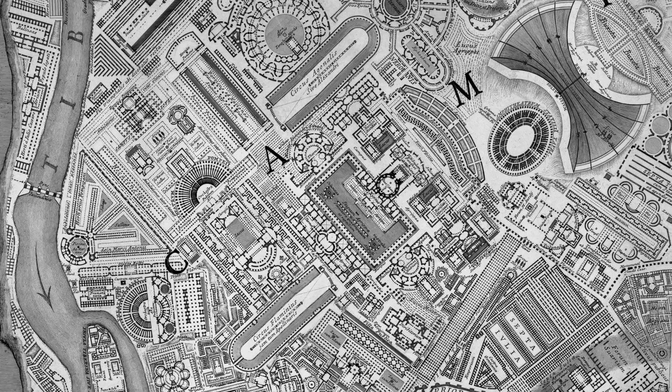The theme of this video is the Niclewicz house, a true architectural treasure hidden in Curitiba, capital of the southern state of Paraná. It is reassuring to be able to find such a serene and receptive work at a time when almost everything is appearance without substance, and when a mistaken idea of creativity predominates, resulting in extravagant objects, visually

striking but culturally irrelevant. Designed by Vilanova Artigas in 1978 for his niece, it was acquired in 2003 by Curitiba architect Marcos Bertoldi, who carried out a series of renovations which, far from disfiguring the original project, ended up further qualifying it.

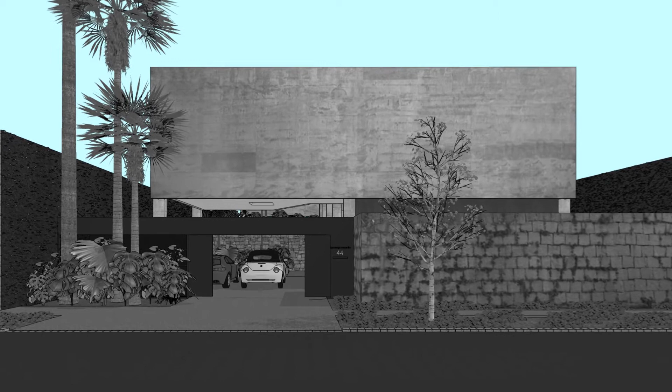The Niclewicz house belongs to the brutalist universe. But as this definition is too comprehensive, one can add to it some recurring characteristics it shares with São Paulo architecture of the period in question: the role of spatial definer of the resistant structure, the tendency to a certain introversion, and the use of large windowless end walls, in addition to the use of exposed reinforced concrete.

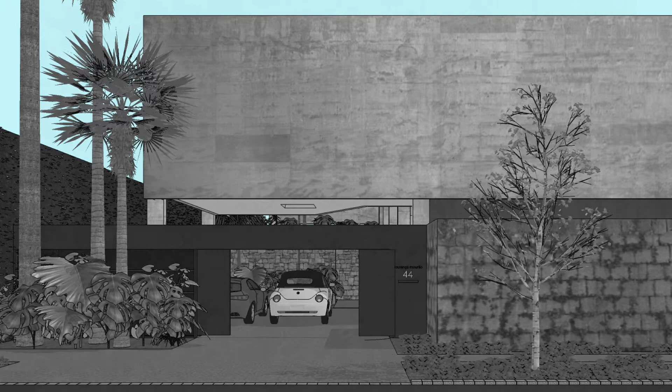The house is located in the Seminario neighborhood, a few minutes from important areas of the city in a predominantly residential street. The site is 22 meters wide by 35 meters deep, and its level is much higher than that of the street.

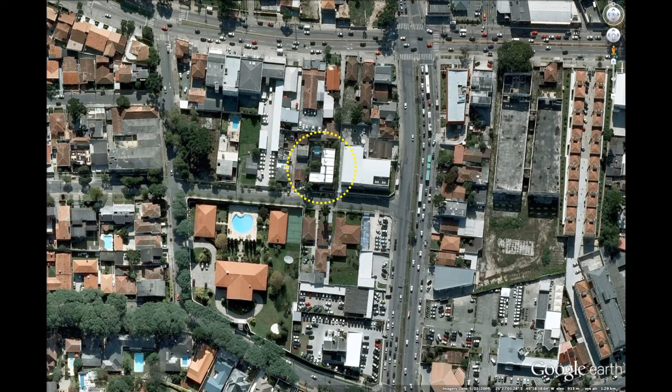It is well known that a good project can and should in general be described in a few words. Thus, we can describe the Niclewicz house in two ways, equally brief. Either we see it as an L-shaped plan that embraces a courtyard, or as a rectangular plan in which 3/8 of its projection are dedicated to this courtyard. In any case, the plan consists of 8 modules measuring 8 by 6 meters, the total measure of the house being 25 by 17.5 meters.

15 pillars of 50 by 25 centimeters are placed on this initial grid, which, with the beams that join them and the two gables on the smaller sides of the rectangular plan in exposed concrete, define not only the resistance structure but also the formal structure of the house.

This primordial role of the resistance structure is a distinctive aspect of the architecture of the so-called Paulista school, whose main exponents were Artigas himself and Paulo Mendes da Rocha, and part of the production of the Carioca school, especially the work of Afonso Reidy.

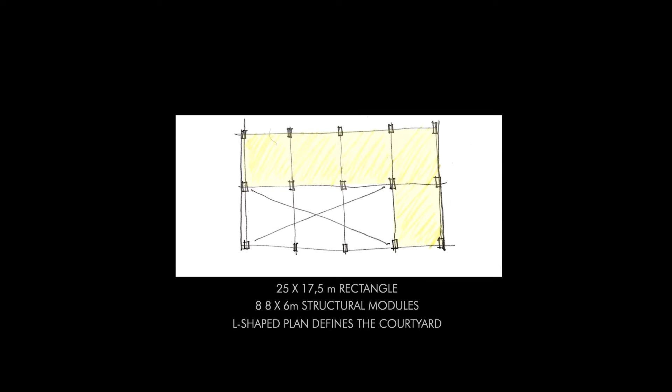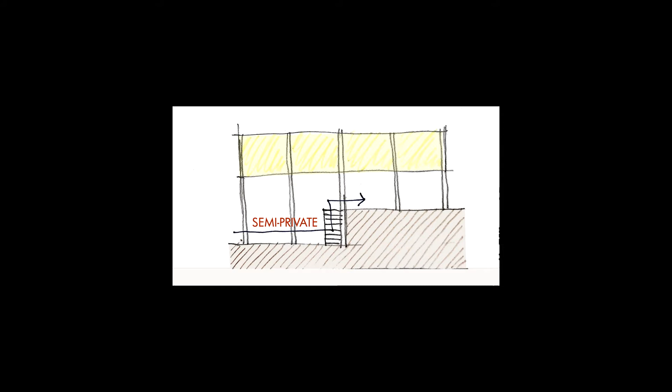This clear and consequent planimetric organization served as the basis for resolving the implantation of the house on the steep terrain. A vertical cut in the terrain coincides with half of the rectangle, defining an access and parking sector at street level, originally open to the street but later closed by a metal gate, and a higher one that defines the private courtyard.

Positioned more or less centrally on the ground, there are 4.4 setbacks at the back of the site, 2.5 at the sides, and 4.7 at the front. The circulation scheme of the Niclewicz house is an aspect that deserves some attention.

The ramp has become almost a signature in the architecture of Artigas. It appeared for the first time in 1949 at the Czapski House and evolved by means of several other domestic projects, reaching its full development here in what was Artigas's last residential project.

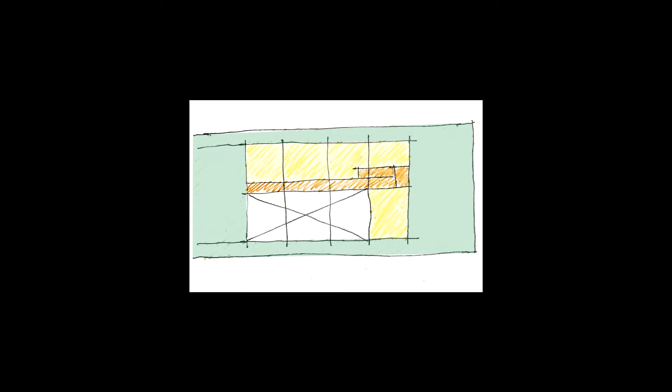Nowhere else does the ramp integrate more naturally with the spatial organization, connecting perfectly with the living room, the intimate living area, the den, and the upper corridor. Here we see the vertical circulation, which is the ramp, and the horizontal circulation, the corridor that serves the bedrooms.

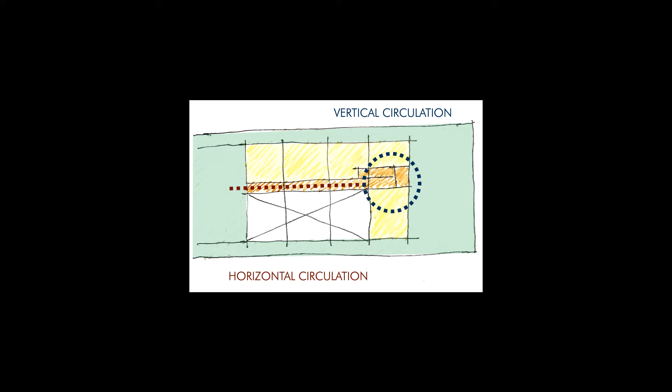The house program is spread over 4 levels. At street level, there is the access and the parking. Then comes the original level of the site, where the social area and the courtyard are. Half a story up there is a den, and another half a story up one comes to the bedroom floor.

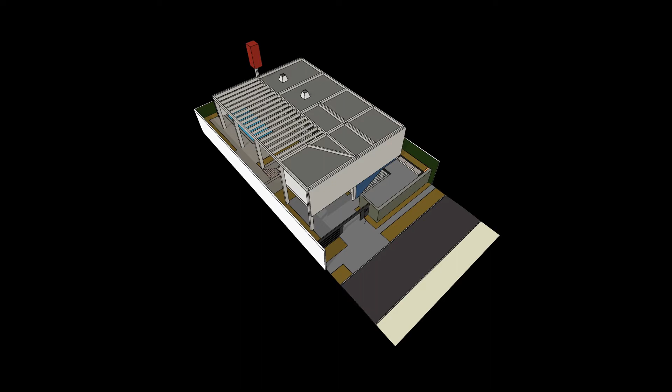If the figure of the courtyard appears in the two initial descriptions, it is because this exterior space is the visual focus of this house. A large exterior room defined three-dimensionally by the L-shaped volume that houses the interior space, by the rear gable, by three exempt pillars, and by beams that form a kind of giant pergola. In this way, we are aware of all parts of the house: the living room, the ramp, the circulation of the bedrooms, and the private room.

At the access level, we have the parking area, the main and service access, and several spaces originally for service, today transformed into the office of the architect Bertoldi, who enlarged them without this being easily perceived, as he intelligently used the space defined by the retaining walls in front of the terrain. More on that at the end of this video.

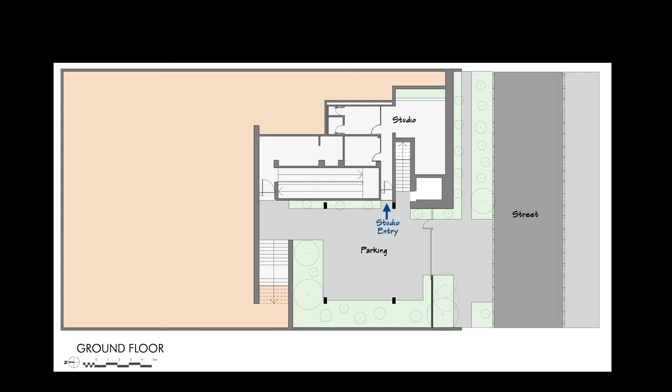And we have the access to the studio, access to the garden, and access to the house. Just after entering, there is a meeting room that serves the studio, a restroom, and the ramp. On the second level are the courtyard, the living dining room, the kitchen pantry, and other service spaces. A staircase parallel to the south gable connects the service sector to the intimate sector of the house.

Upstairs are the 5 bedrooms. Half a level below, in the shortest leg of the L, is the den, from where you have an elevated view of the patio or courtyard. With the exception of the den wing, the entire program was accommodated in the east half of the rectangle, occupying 4 modules.

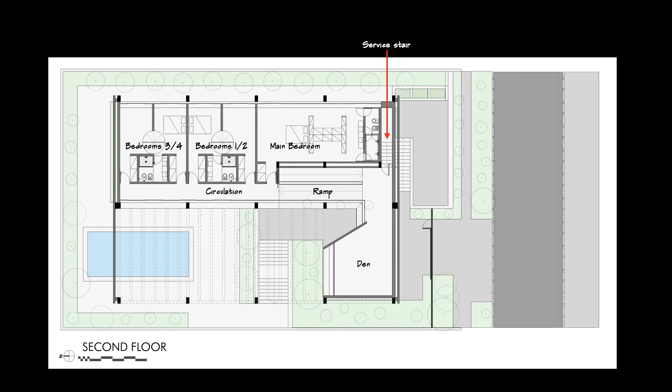Here is the roof plan, in which we can see this diagonal beam appearing, and it's a curious thing because it's the only diagonal in the whole project. We might think this is an odd thing, something which is not well related to Artigas' architecture, but then when we reach this point in the description, we'll see the role that this diagonal beam plays, and this role is very important.

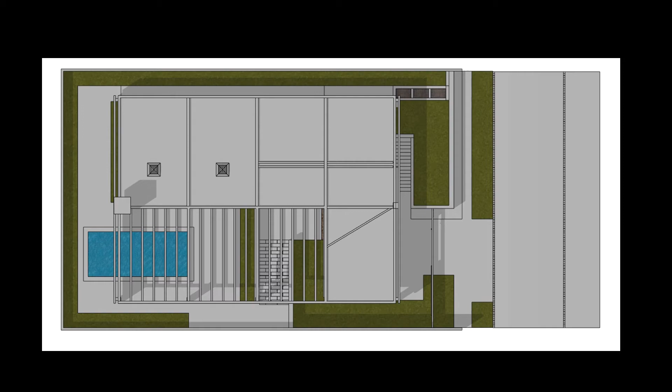Seen from the outside, the most evident elements of the house are the retaining wall made of granite blocks, located on the alignment of the site to the right in the picture, and a rectangular elevated and slightly recessed plane, the southern gable of the house. The solution endows the domestic spaces with absolute privacy and contrasts vividly with the openness experienced from the inside.

You enter the site through a covered space defined by the projection of the den, a dark gray Portuguese stone floor, and a very pleasant vegetable frame. From there, you can enter the studio or advance to access the residential area. It is also possible to glimpse something of the spatial relationships that take place on the upper level and inside the house.

Having reached the end of the access plateau, the house offered the visitor two access routes, one inside by the ramps, the other outside by the stone staircase, arriving in the immense open air hall which is the pergola. Two very different and equally rewarding experiences. It is difficult to determine which is more interesting. Going up the staircase, looking back to the entrance, a little further up, looking back to the main entrance to the house, and we can see the ramp from here.

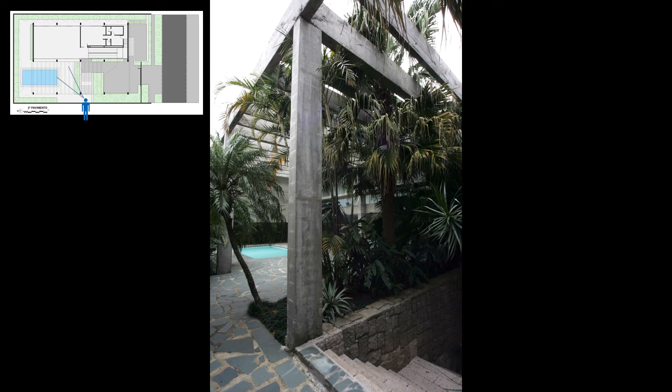Entering the house through the courtyard starts with climbing a stairway entirely made of stone. The steps are formed by two or three massive blocks alternately, and taking a 180 turn places us under the large space defined by the pergola, an exterior with some interior characteristics.

The courtyard is the focal point of the house. What could be easily a residual space has the characteristics of a double height hall due to the presence of a few pillars, the beam that joins them, the rear gable, and the upper beams that cover the empty part of the rectangular plan, reinforcing the feeling of being in a diaphanous interior surrounded by vegetation.

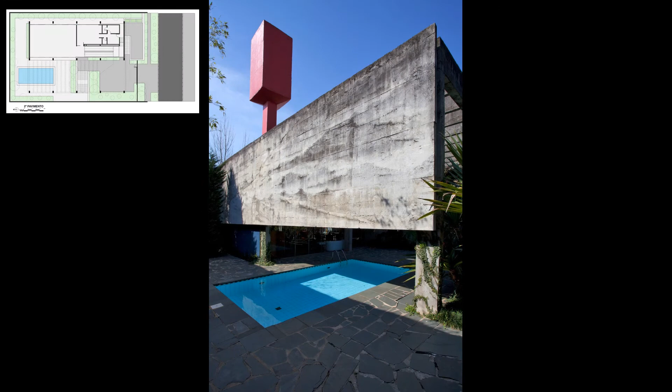Here, one is located at the back of the house, looking at the back gable, which is absolutely alike the front one. One thing to be noted is the water tank, the reservoir, which is an Artigas signature, because he, in most of his projects, put this kind of vertical box, which is supported by one of the columns that is extended upwards to receive the box. And in general, they are painted in very vivid colors.

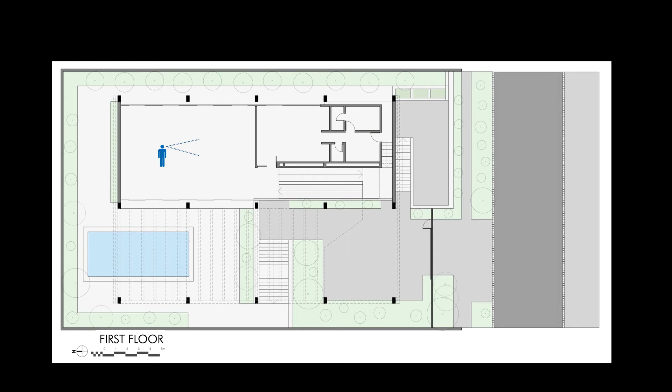The living dining room is a magnificent space in which we find ourselves between gardens. On one side, the small gardens that is the lateral setback, and on the other, the courtyard just mentioned. The low ceiling height of the room directs our gaze to these pleasant exteriors.

The interior access route starts from a low space and in relative darkness, where there is an area for meetings and a restroom. From there, it ascends by a ramp with a black rubberized floor, and the space becomes progressively more illuminated. The first stop on the ramp takes us to the living room and service area.

Halfway between the living room and the bedrooms, at the point where the ramp turns back on itself, there is a smaller living room that is the coziest place in the house, with a generous view of the courtyard and the pool, but sufficiently defined by walls to allow a feeling of withdrawal, which contrasts positively with the visual expansion of the main room. Here we see why that wall is at an angle, because it opens up the view to the courtyard from the landing, from the point where we either go to the bedrooms or go to the den.

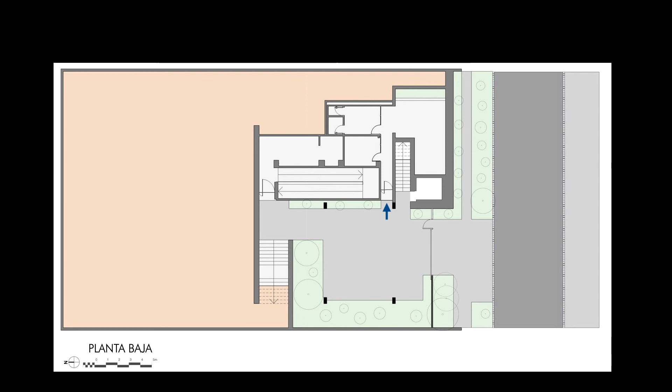And here we have the situation before the renovation of the space. We see here where the studio is, and the green rectangle on top of it is from where light and air enters the room and creates this kind of space. Very small space, but which is qualified by the entrance of light at the very end. A very clever solution to this problem.

Also to note is the interior side of the rocks, the granite wall on the right, which before was a retaining wall, so there was no reason to be careful about the irregularity of the granite blocks, which was taken care of in the exterior. But then it became very interesting for the architect's studio. Here, how the opening is covered and protected on top of that granite box, and a number of details of the house.

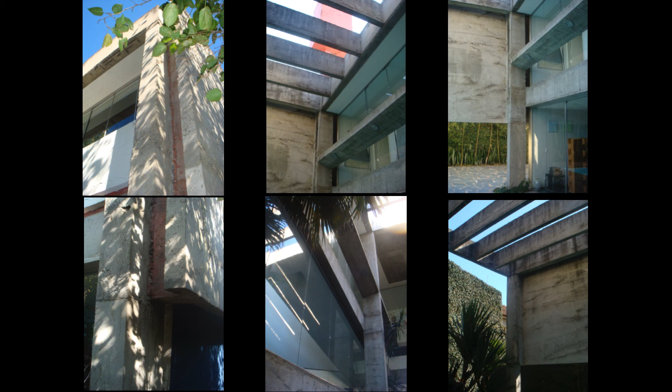One of the interesting ones is shown in the 2 pictures on the left, where we see the column and the front wall separated by a red strip, kind of recessed red strip. It's a house that could seem a kind of rustic work, but it's full of very, very subtle details.

The current house can be considered a joint work between Vilanova Artigas and Marcos Bertoldi, because the current owner, unlike many cases of intervention in buildings classified as heritage, further qualified the house by renovating the toilet, the bathrooms, and the dormitories. Here and there we find new elements that serve to enhance the quality of the existing building, such as the metal gate that closes the house to the street, the replacement of the original floor by black rubber, and the red glass door that limits access to the dormitories.

The Niclewicz house, both in its original design and in its current state, provides a definitive example that high quality in architecture does not depend on luxurious materials or bizarre shapes. A correct combination of space, color, vegetation, and natural materials can take us very far.